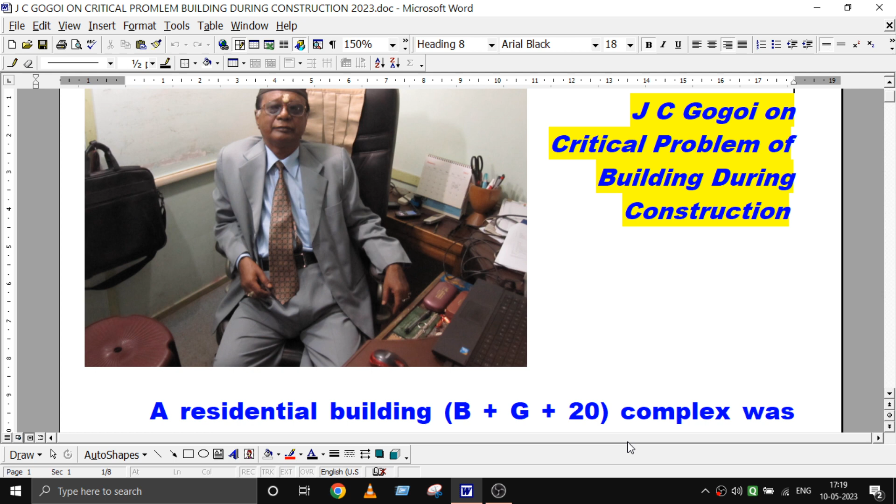Today, I want to discuss a critical building problem during construction, neither of which can be termed as a failure or any kind of failure, although there are severe structural cracks developed. I was appointed as a rehabilitation consultant for a quite big residential building, about a 22-storied building complex

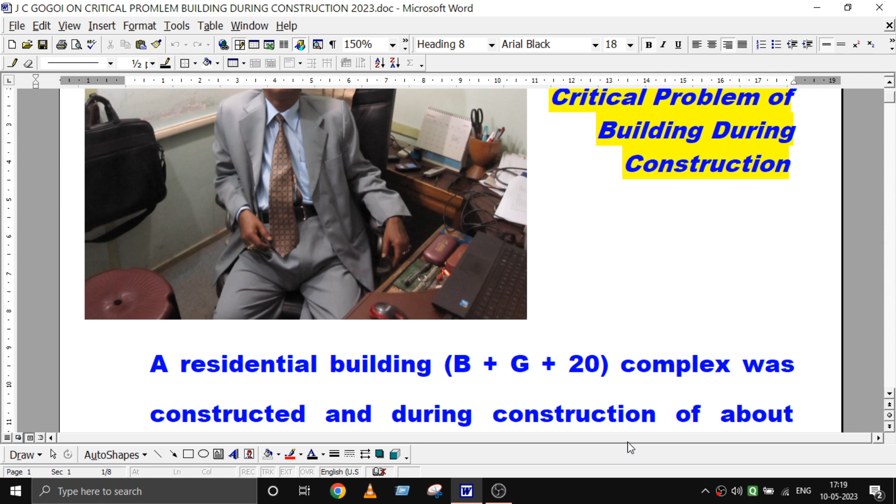which was constructed during 2022, and I was appointed just after the commencement of second story construction. Initially, I was informed that there was a serious foundation failure.

Normally, when I say it is foundation failure, there might be some SBC failure or excessive settlement. For any one of these reasons, the building may be termed as a foundation failure. But for a 22-storied building, during construction of the second story, in such cases, it cannot be a foundation failure. On principle, it is very difficult for me to digest this term foundation failure.

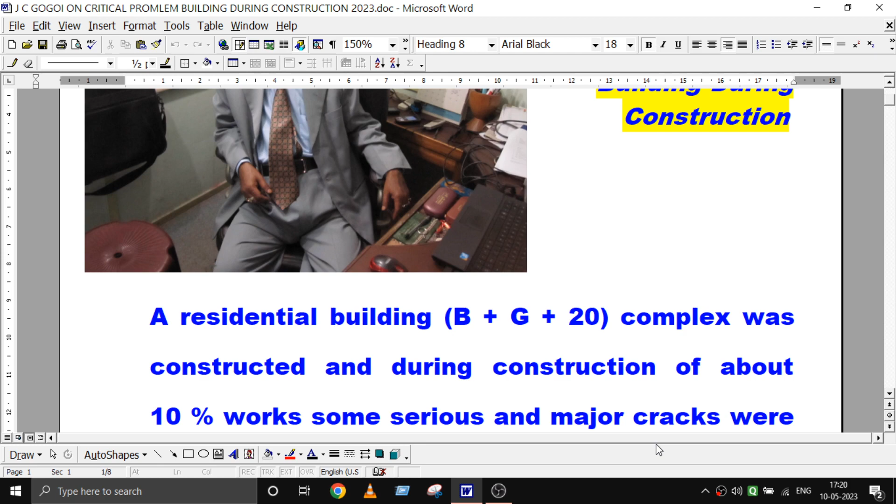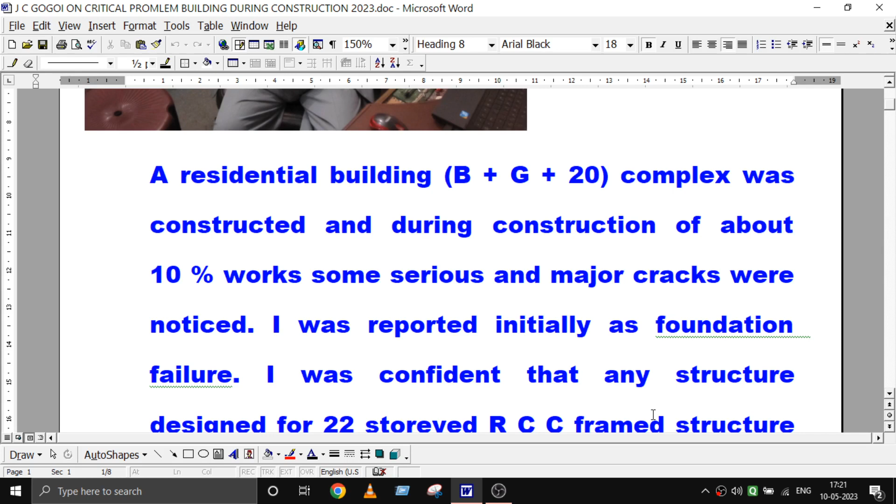The building was B plus G plus 20. It is a residential building. There will be a few blocks. The first block had started with an RCC raft foundation, that too at a depth of 8 meters below ground level.

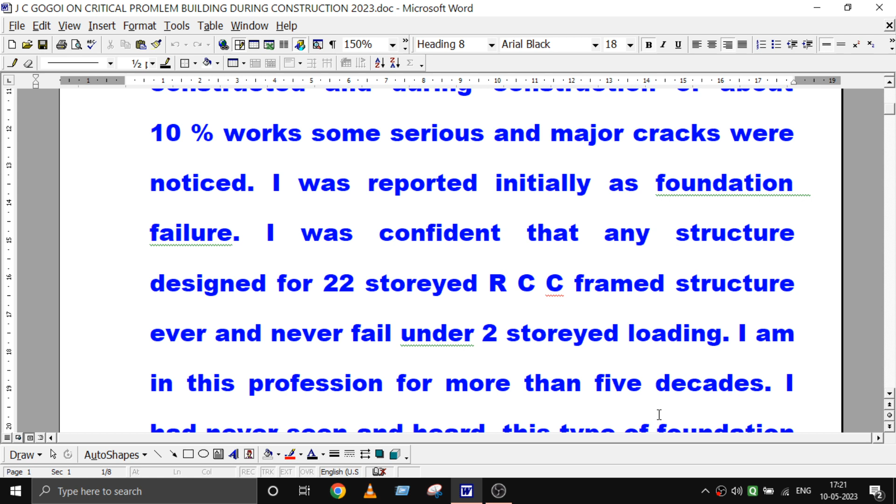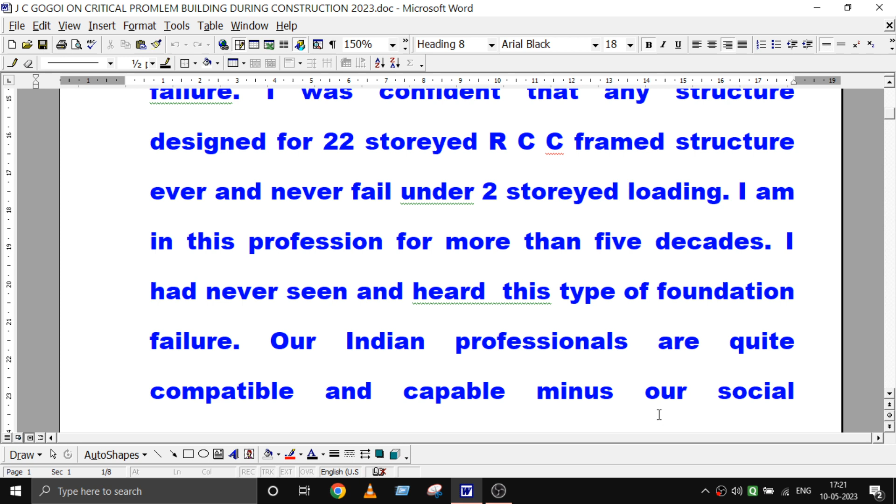I have been in this profession for more than 5 decades. I had never seen or heard of this type of foundation failure. I can confidently say our Indian professionals are quite competent and capable, minus our social recognition. Even our workmen are very much efficient in their own field.

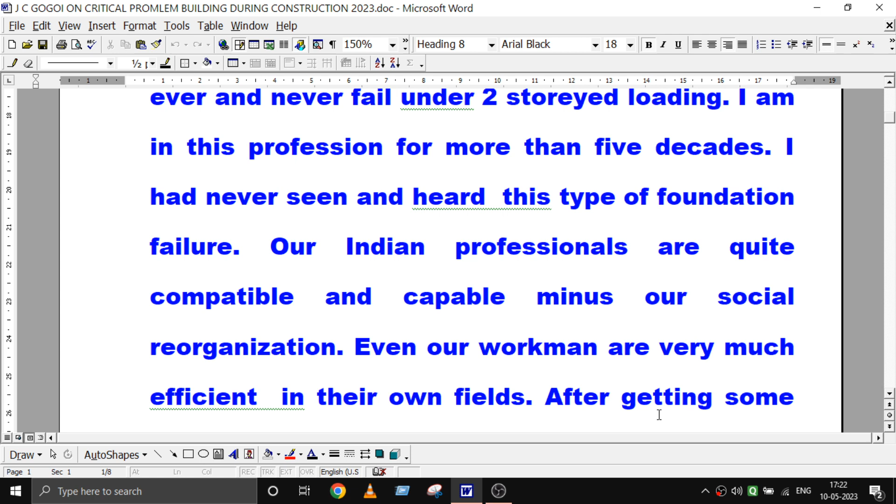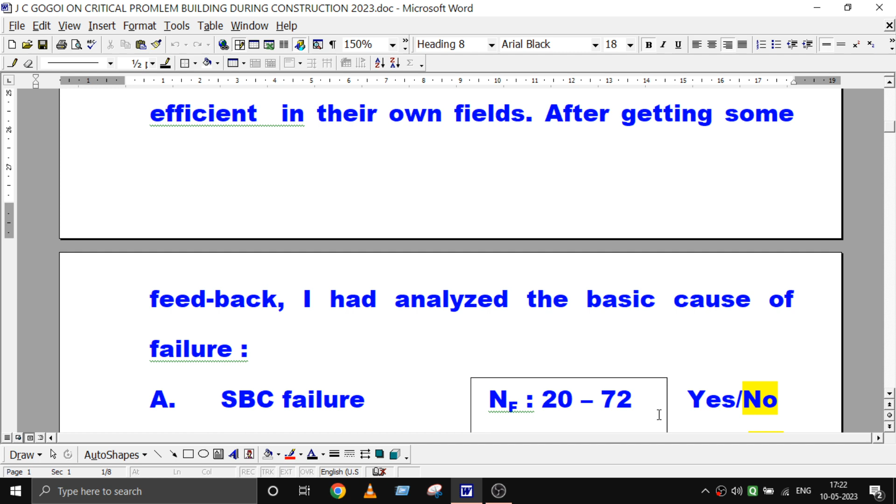The primary feedback I was furnished by my client and project consultant simply said that it is foundation failure. Under these circumstances, I considered some basic reasons for foundation failure.

It may be SBC failure, but we got information that the field N value recorded at ground level is 20, with a tendency of increasing with depth up to 72 at a depth of 30 meters. And the average N value at the mid height of the raft is 45. So it cannot be an SBC failure, since at an N value of 45, SBC shall be around 30 ton per square meter plus. So SBC failure has been ruled out.

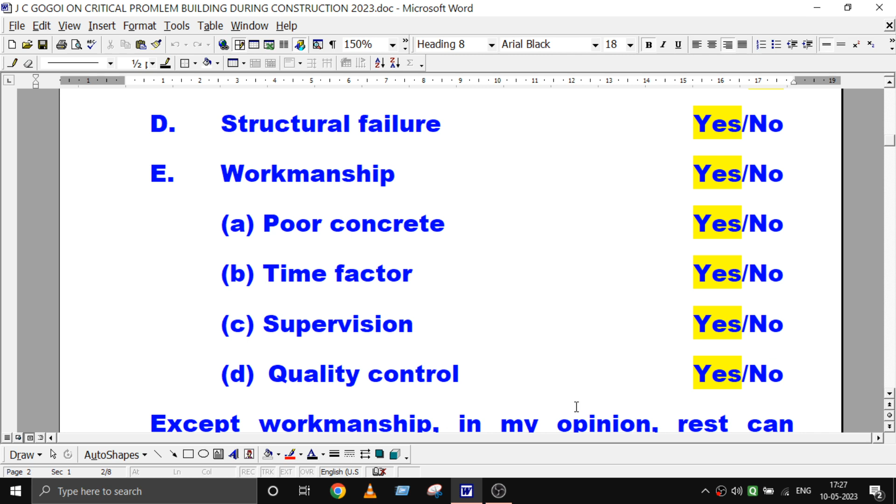The main demerit is workmanship. Workmanship, poor grade of concrete, time factor, lack of proper supervision, quality control. There is no quality control at all. So all these workmanship problems produced these cracks. It will be very difficult to disagree with me.

This is the raft. You see, this is a big pothole, about 1 meter. A big pothole is there. The raft is a solid base, about 1 meter or more. Concrete should be laid there with vibration. And such a big pothole is there. How can I say that quality is maintained? How can I say it is good workmanship?

No one can agree that it is good workmanship, good supervision, proper concreting, proper grade of concrete. No one can say that. Let us see.

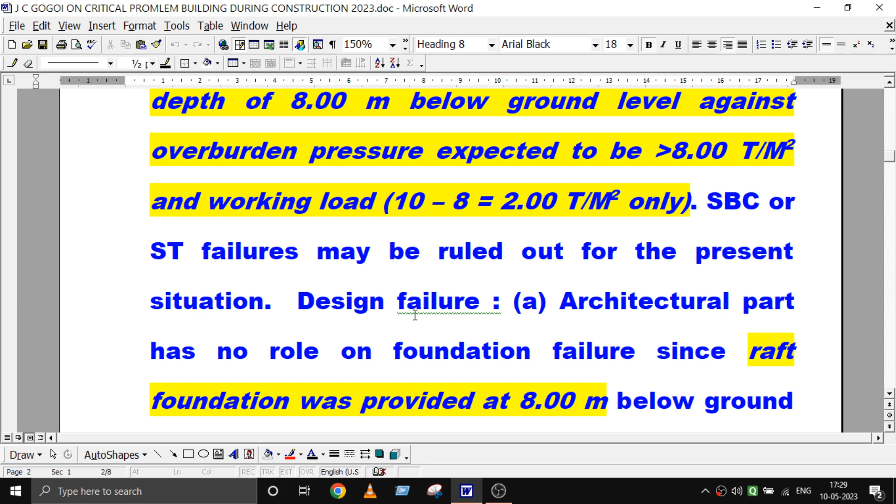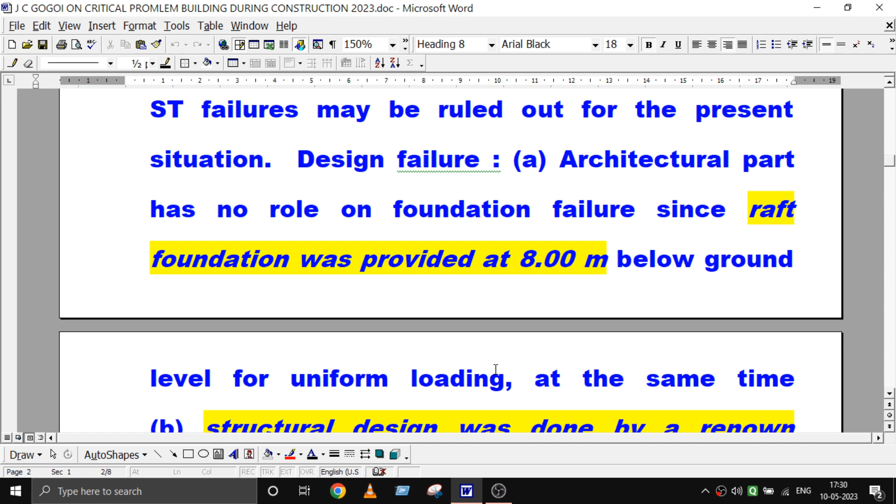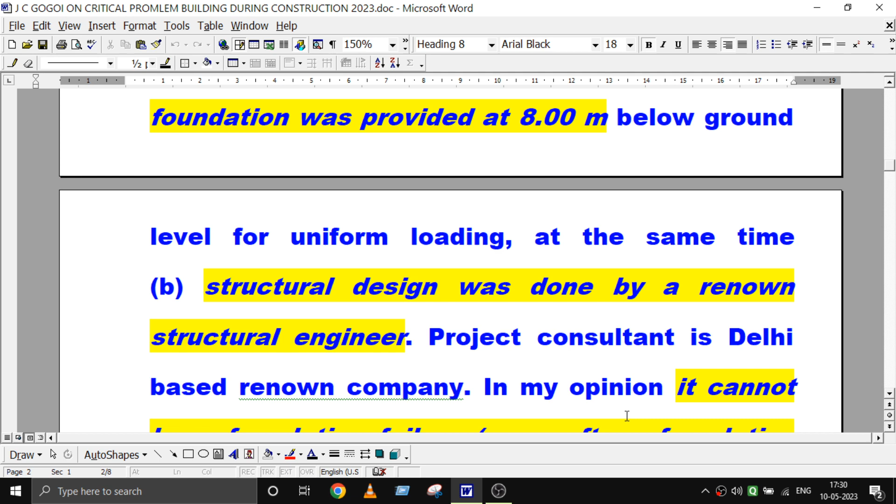This is at 2 ton loading. Lot of structural cracks are there. As I told earlier, SBC or settlement failure may be ruled out for the present situation. Design failure - the architectural part has no role in foundation failure since raft foundation was provided at 8 meter below ground level, for uniform distribution of load. So there cannot be any failure. Structural design was done by a renowned structural engineer, and the project consultant is a Delhi-based renowned company. In my opinion, it cannot be a foundation failure.

But however, more often foundation consultants have to face the blame because it is very easy to transfer the demerits lower down only - soil being the lowest one. So anyone can blame that the soil consultant did some mistake. But when...

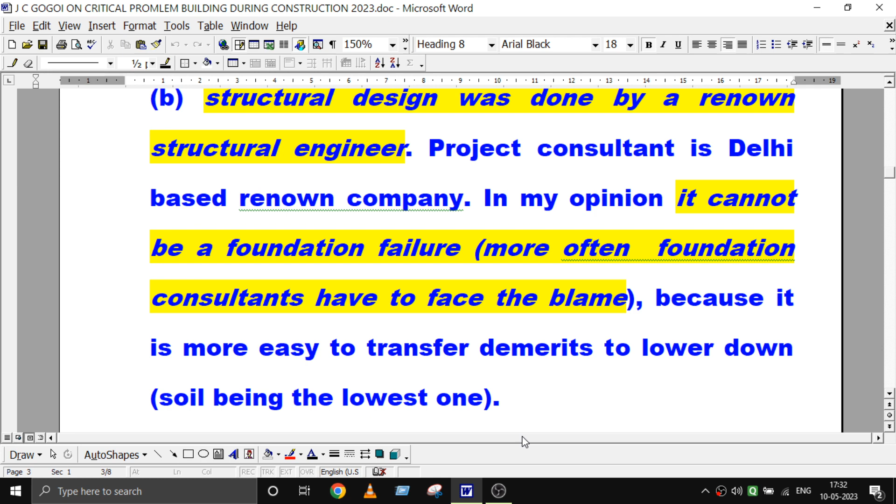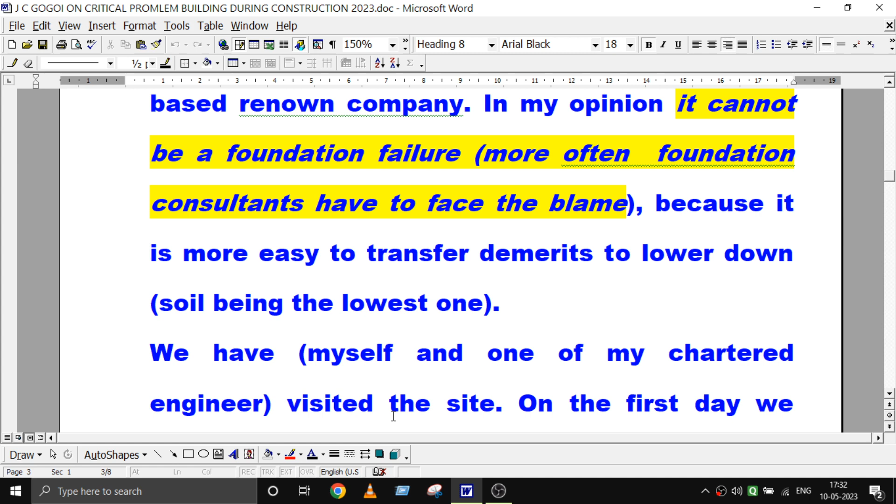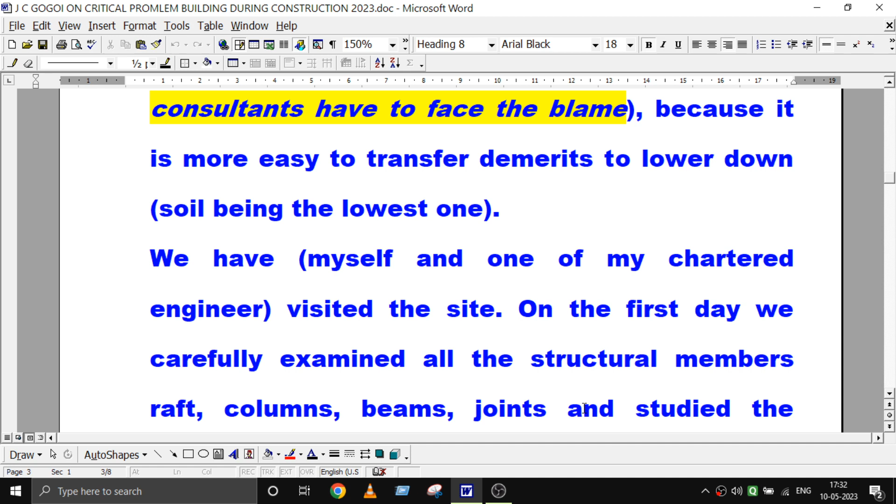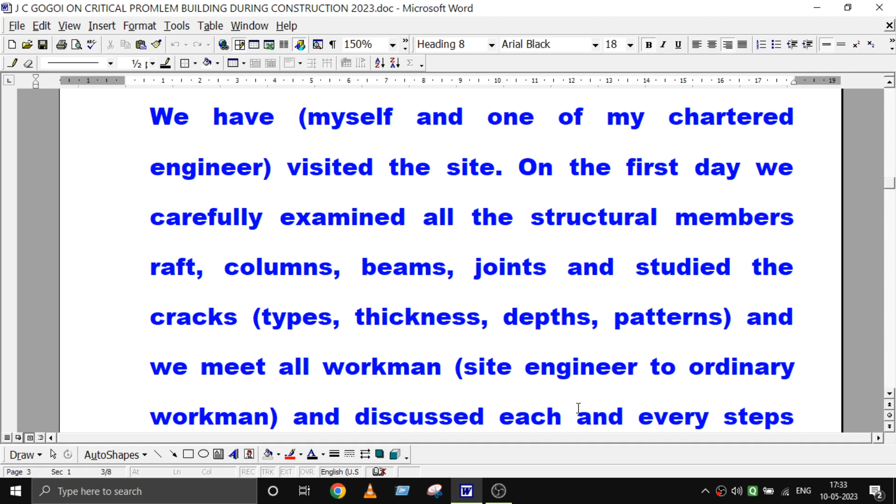So myself and one of my assistant chartered engineers visited the site and we discussed, carefully examined all the structural members - raft, column, beam, joints - and cracks were carefully studied, crack type, thickness, depth, pattern in detail. We discussed with all workmen at site, from site engineer to ordinary unskilled labor who was engaged for curing and watering. We took their involvement in the building construction period, and all of them are trying to give some protection to their own self, but...

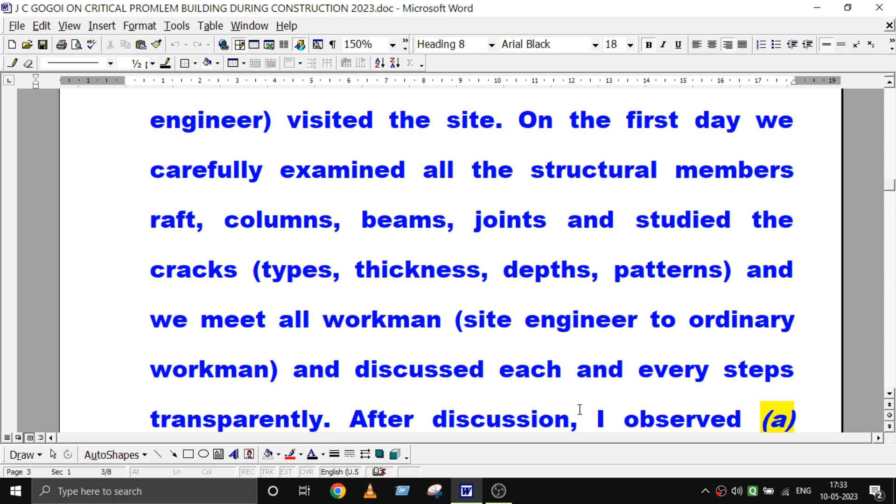These are all open secrets. After discussion, we finally observed poor quality, poor workmanship. In between, concrete quality control is included, supervision is included - it is very poor quality. And the time factor - not at all given appropriate time.

For initial setting also, we require - initial setting and final setting we require almost in winter season. For final setting it requires about 48 hours, not exactly 8 or 10 hours. Although the company says it is 8 hours, but especially in winter season when temperature is below 15-20, because our required temperature for curing is 27 degrees. Artificially we cannot make our environment in winter about 27 degrees. So we have to accept nature - we cannot overcome nature, we have to accept the principle of nature.

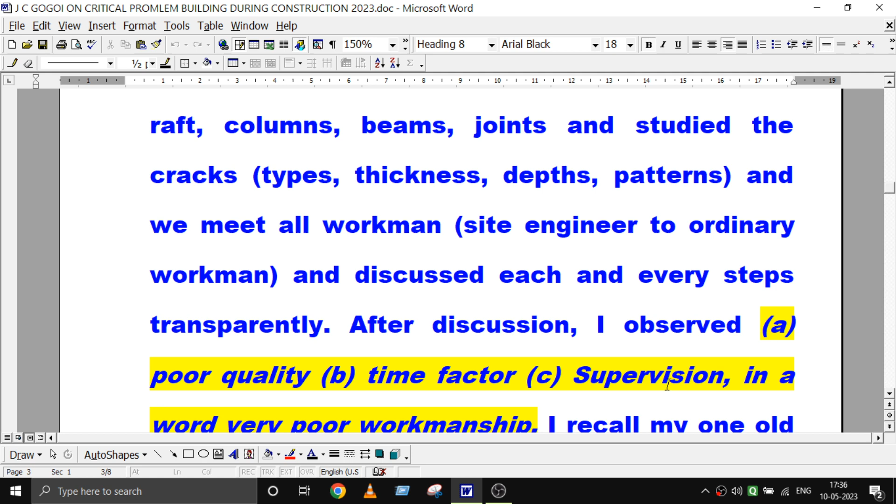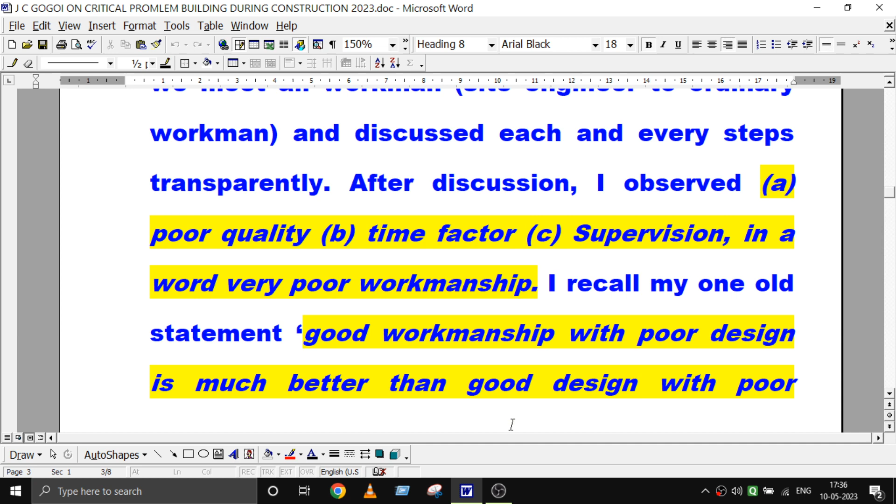I recall one of my old statements. I said in a conference, good workmanship with poor design is much better than good design with poor workmanship, which was at that time very highly and sharply criticized. I was not going to blame anybody. I have never said that engineers are not at all responsible, but I want to give more importance to workmanship.

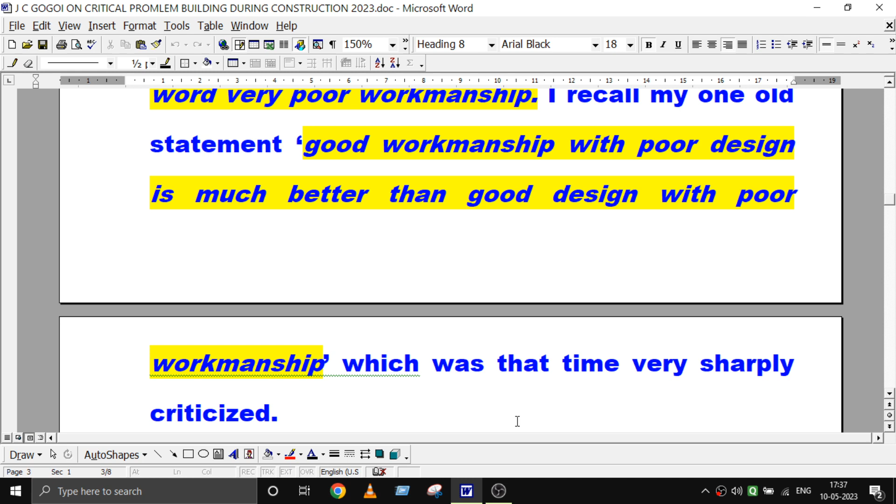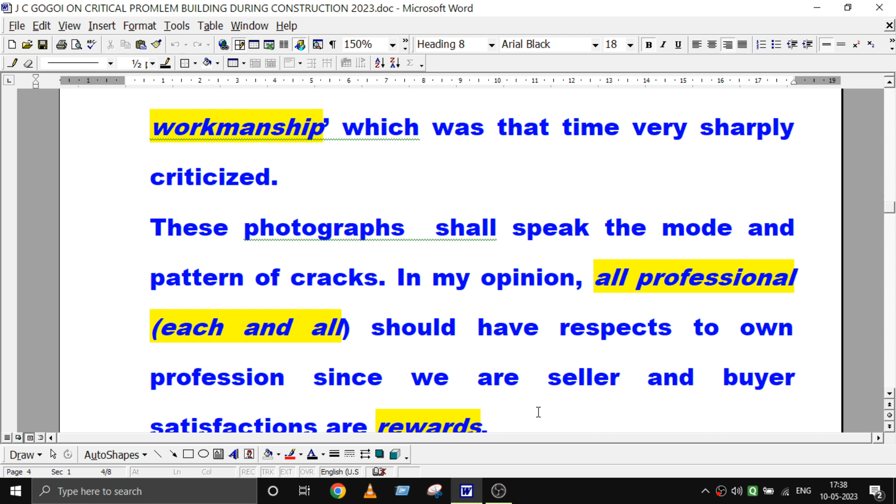But that was misinterpreted during that time. Now, many a time, I saw these things only. There are some photographs we have collected, and all these photographs shall speak the mode and pattern of cracks. In my opinion, all professionals should respect their own profession since we are sellers, and buyers' satisfaction is our reward. Professional means we are selling our technical know-how, and when our buyer is satisfied, that is our reward.

You see, this is the raft. Here, without backfilling the side of the raft - because it is basement, so it is ground floor slab - this basement should be filled, because during excavation the load at the raft will be not uniform, because some lateral support shall be necessary. Without lateral support, here it is 8 meter on raft, here it is 8 meter outside.

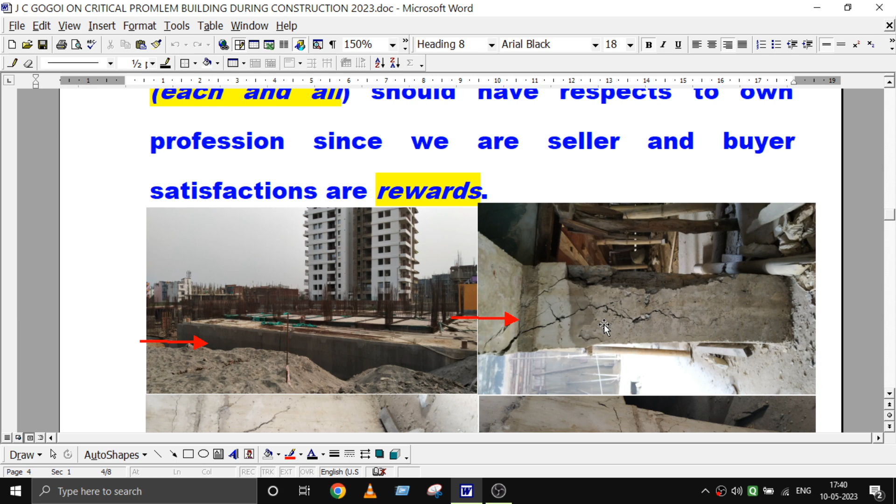Column beam joint crack. This is the column beam - this is beam, this is column. You see. This is column, this is column. And this is

beam crack. Here also a lot of micro cracks are there. These are all micro cracks. Not only this one crack, there are a lot of cracks everywhere. Here also there are a lot of cracks.

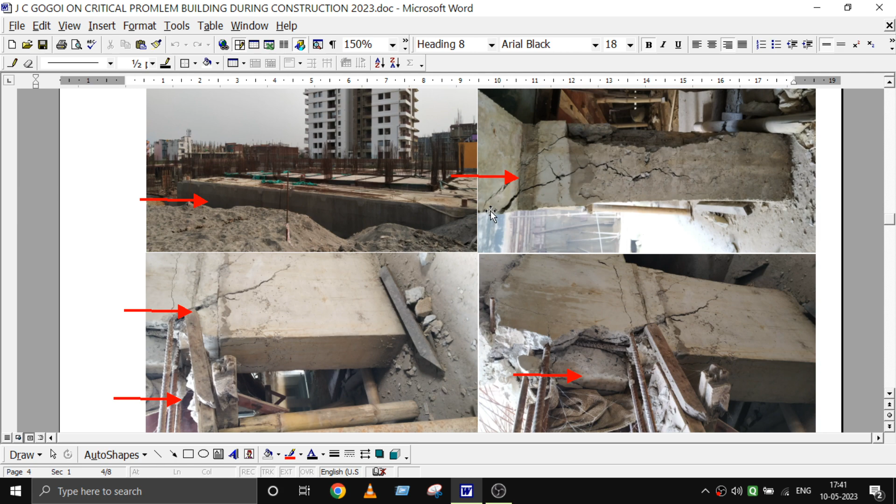If you see from this side also, there are a lot of cracks. Here you see one crack, again another crack. These are a lot of cracks already developed.

This is, you see, the beam junction. This is the column, and this beam is - this is the joint, these cracks. And already I said it is the pothole of the raft.

After seeing this pothole of the raft, I cannot say that the concrete quality is good enough. I shall be now going...

There is some, on my instruction, they have conducted a lot of tests, and earlier also they have conducted some non-destructive concrete test using N-type hammer. It is a good hammer. It is corresponding to 150 mm by 150 mm cube concrete.

Almost 95 to 99% accuracy is there - not less than 95, and up to 95 to 100%. Same parameters I observed in my laboratory and at site. I am observing this accuracy is 0.95 to 0.99, 0.999, like that.

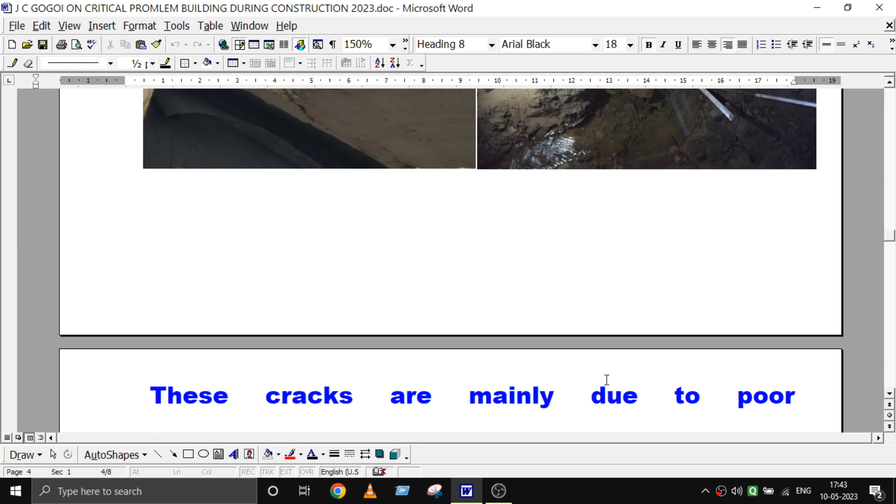These cracks are mainly due to poor workmanship, consisting of quality and time factors. We did not allow sufficient time for final setting. As I told, in winter at 13, 14 degree temperature, the normal 8 hours, 10 hours initial final setting is not sufficient. It may require 3 to 4 days for setting. For initial setting also it may require 1 day, which normally should be less than 60 minutes or so.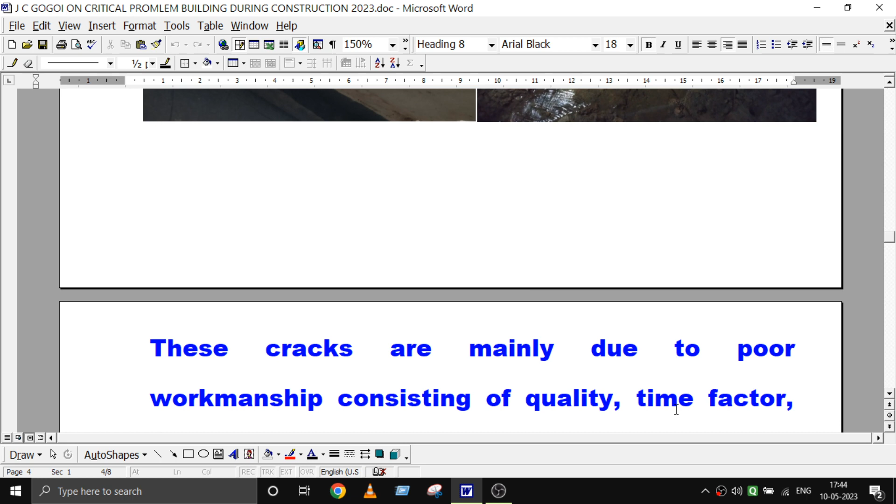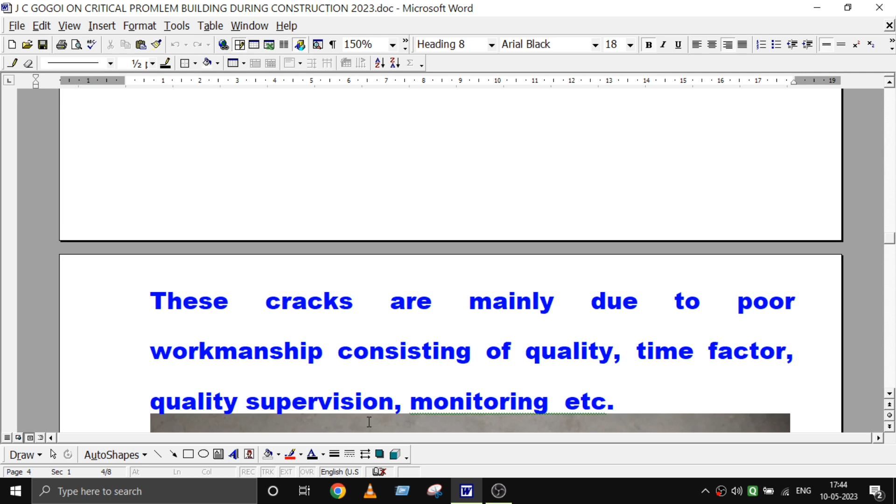Quality supervision and monitoring - in the absence of these things, this structure has been severely affected. You see, these are the cracks on the raft.

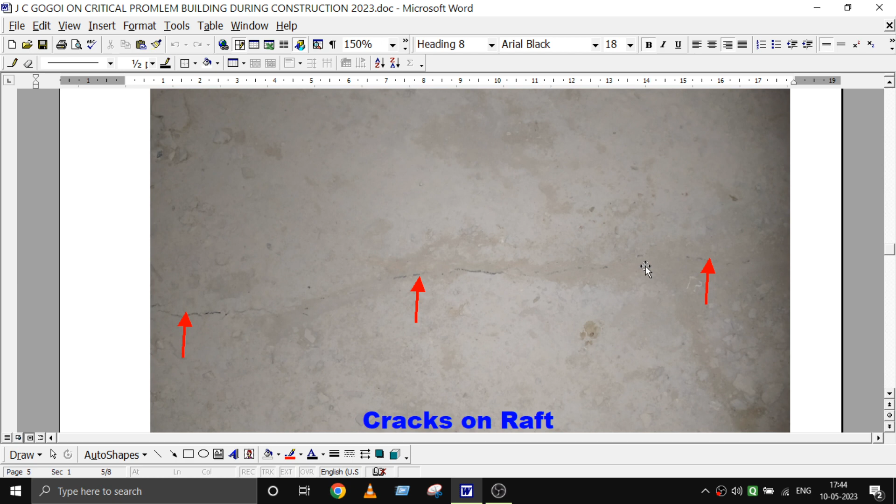Here also these cracks had developed. These cracks, later on, someone tried to rectify by making some rich mortar, patching a little rich mortar. But that is useless - why they are doing this, I do not know.

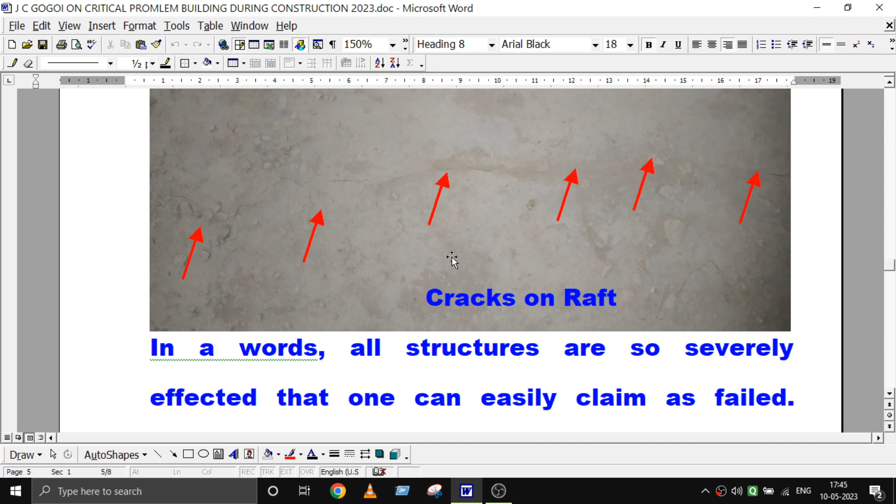In a word, all structures are so severely affected that one can easily claim it as failed. The only option will be to dismantle it, restart the construction from the initial point, and go up.

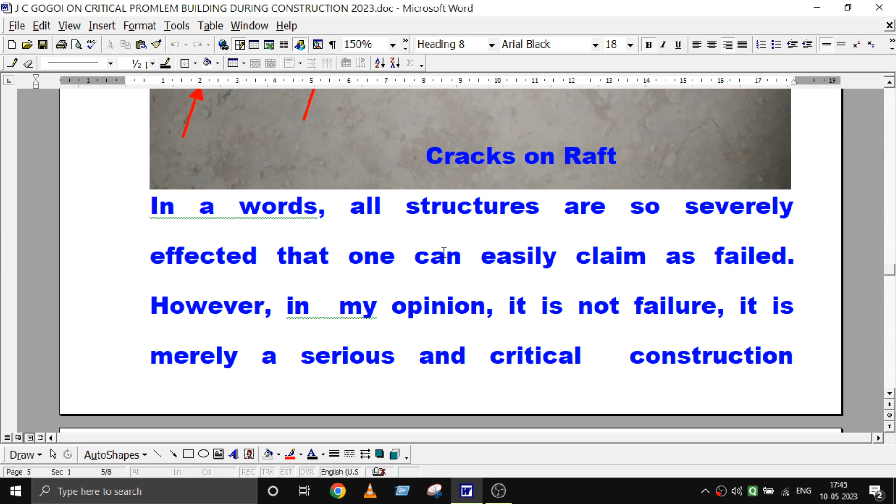However, in my opinion, it is not a failure. It is merely a serious and critical construction problem, which is our own self creation. We have created this problem ourselves.

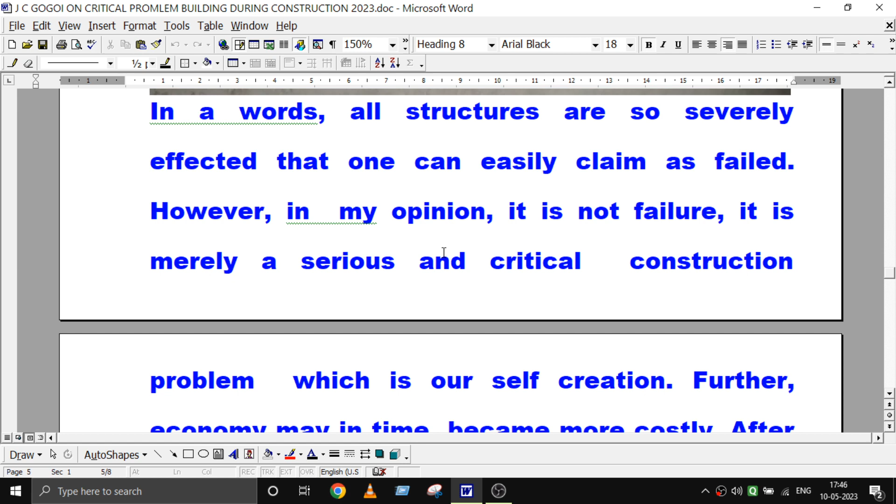Further, economy - that is, time factor. We are trying to save time only because of economy. But time economy may in time become more costly.

As I told, there is no proper supervision, and based on my experience and during visits, what I find is the structure was designed with a concrete FCK - which is called compressive strength of concrete, crushing strength of the concrete - of 25 MPa, that is 25 Newton per millimeter square.

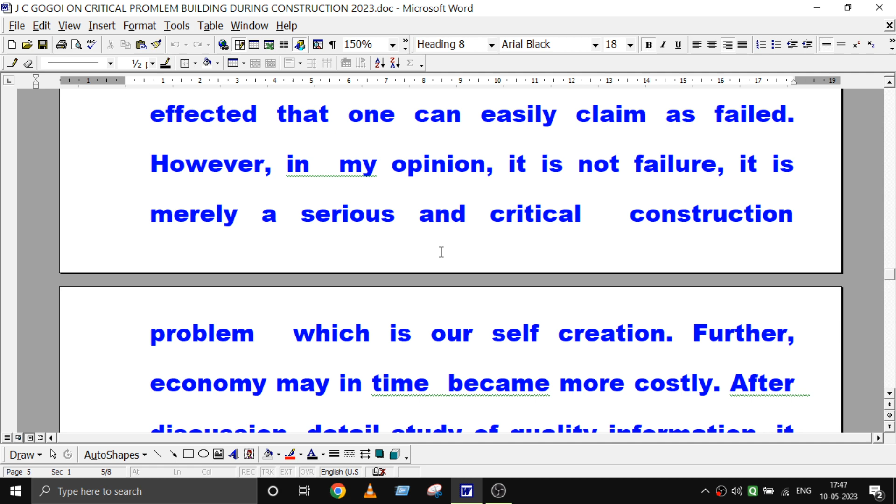Instead of 25, what do we require? Instead of 25, our targeted strength shall be 32 MPa, because 25 plus 1.65 into 4, so our targeted strength is 31.6, rounded up to 32, we require. If we get 32, then our structure we can say our design is for M25.

But in this case, the question of 32 - the targeted strength of 32 MPa - does not arise. Mostly it varies from 12, in 1 or 2 tests it was found 20, for the rest almost it is around 15, average we can say 15. If we are getting 15 as standard and we neglect the standard deviation, how much will it be? M12.

So M12 cannot be used in RCC structure. It has no strength - it is only for some mass concrete work. Up to M15 it is mass concrete work. For mass concrete also, for M15 also, we need...

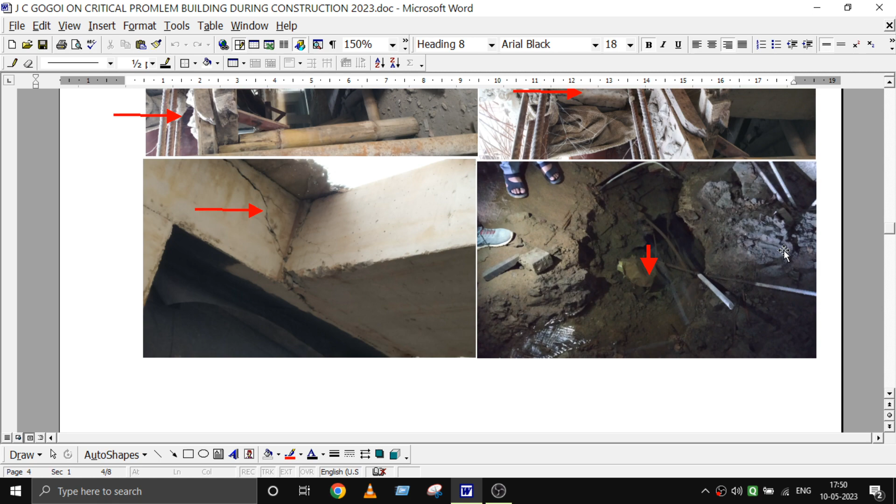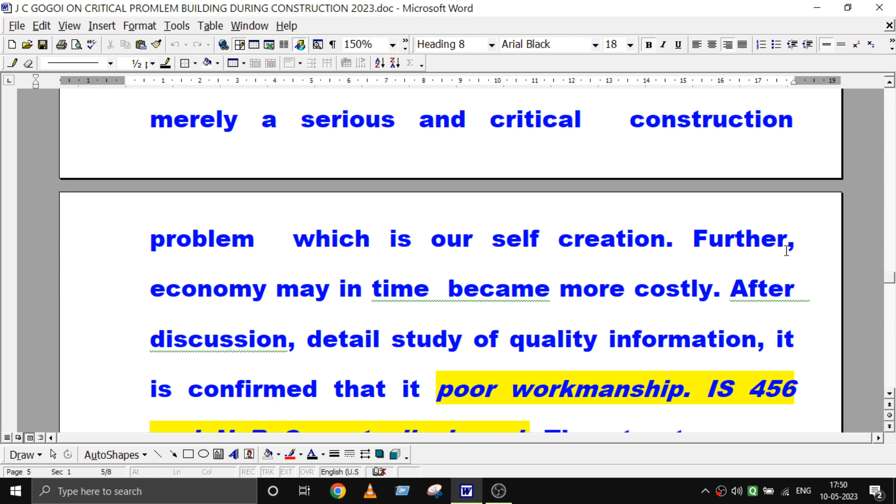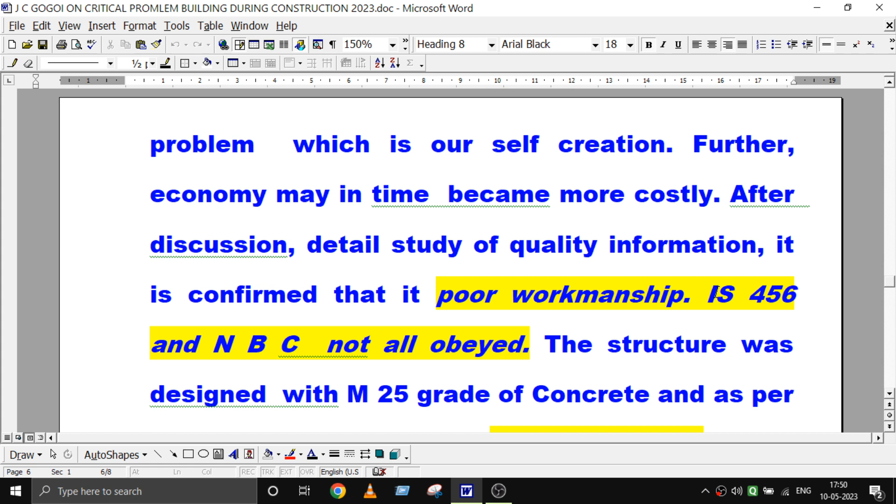Under these circumstances, given this critical construction problem we have created, we should better go for rehabilitation works. In my opinion, besides workmanship, none of the codes - IS 456 or NBC, the National Building Code published by BIS - are strictly followed.

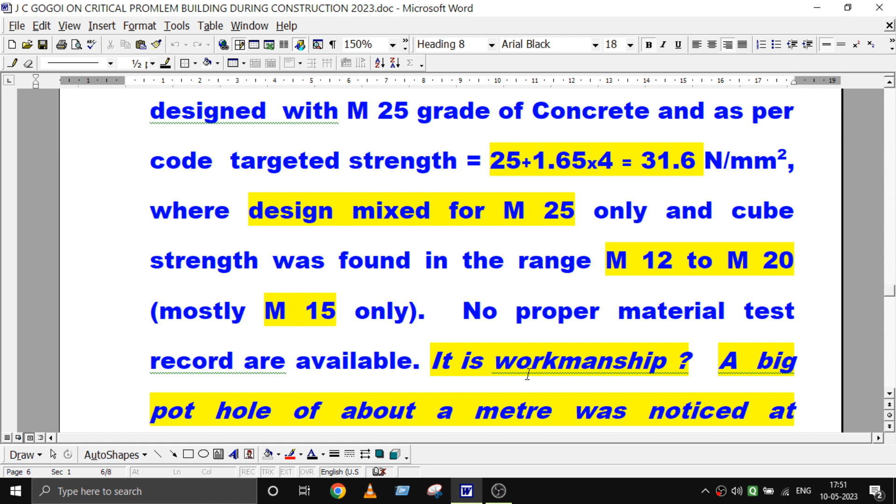Earlier I said M12 to M20. In comparatively few locations, about 5%, they get M20, and the rest is 12, 15, 17, mostly M15. So no proper material test records are available, no concrete cube test records available. So how can I say that this quality is as per requirement?

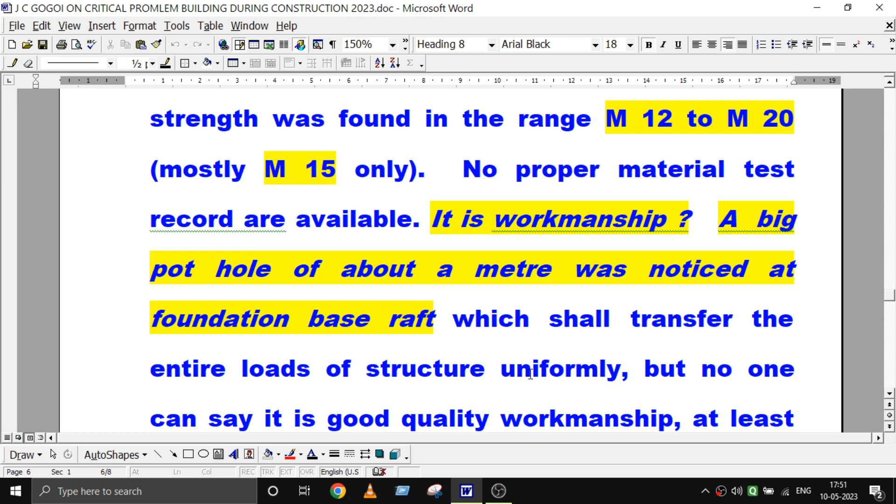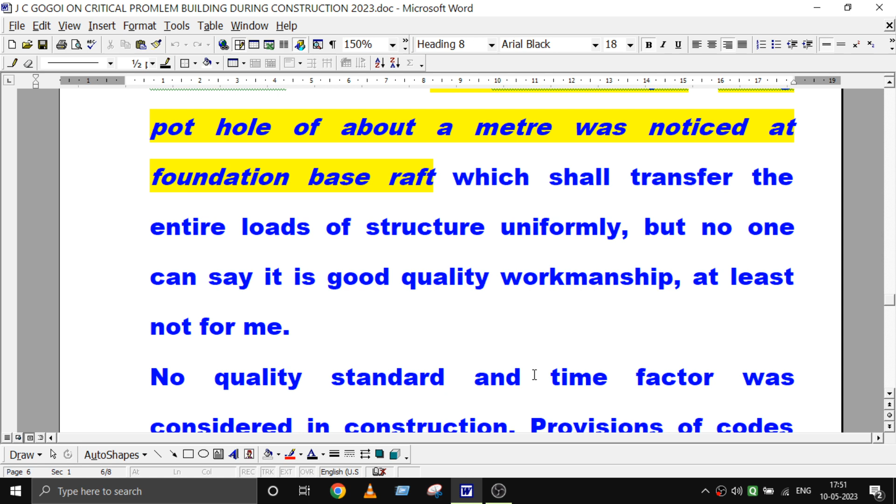Anyway, quality standard for rehabilitation works, and the time factor, was considered very essential. There is a saying - hurry ends burry, hurry ends burry. If we rush, we may lose something.

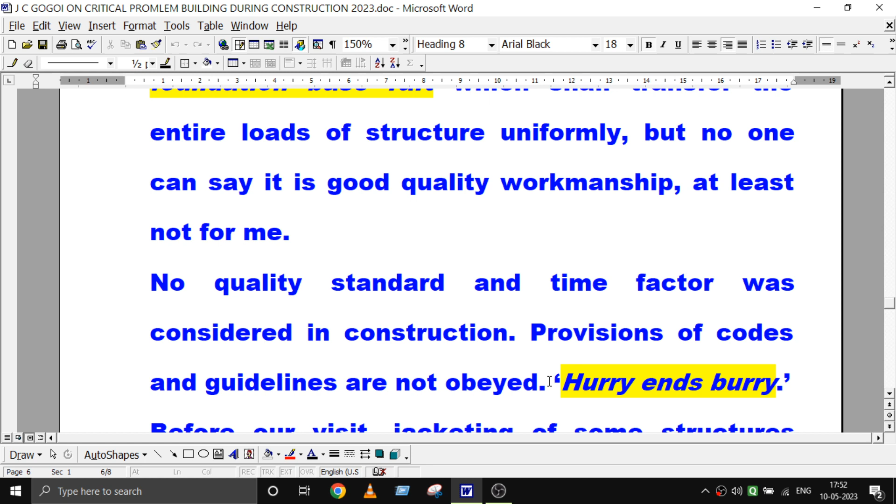Before our visit, they had started and prepared some surface jacketing for the structure. They had done some cutting and removing in some areas for additional jacketing with M40 grade concrete.

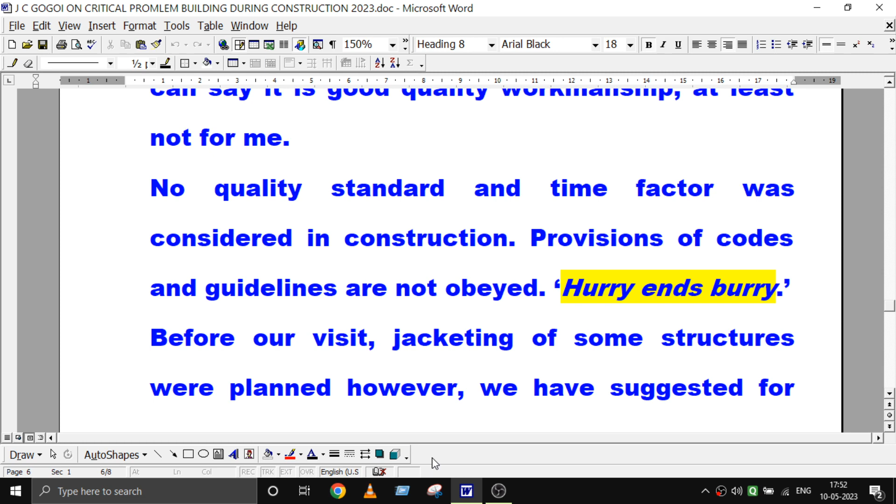We suggested this jacketing work should not be done right away. Before the jacketing work, all structural members should be strengthened using epoxy grouting, engaging one professional agency. Only then should they start the jacketing work in the next phase.

Soon after jacketing and epoxy grouting, we advise them to check the strength properly using an ND hammer, preferably N-type hammer, not an ordinary hammer, so that whole results come through. During selection of graph in the N-type hammer software, there is an option - select the ASTM curve, not any other curve. The ASTM curve is most purposeful, very informative, and very reliable.

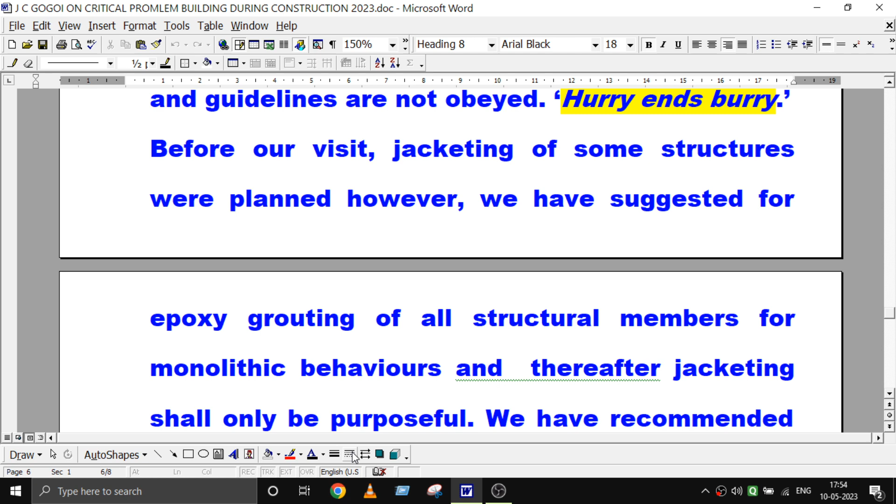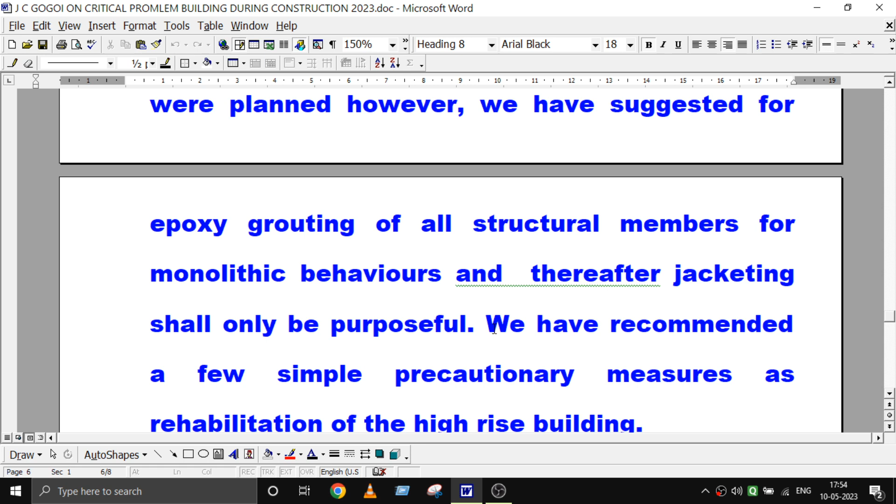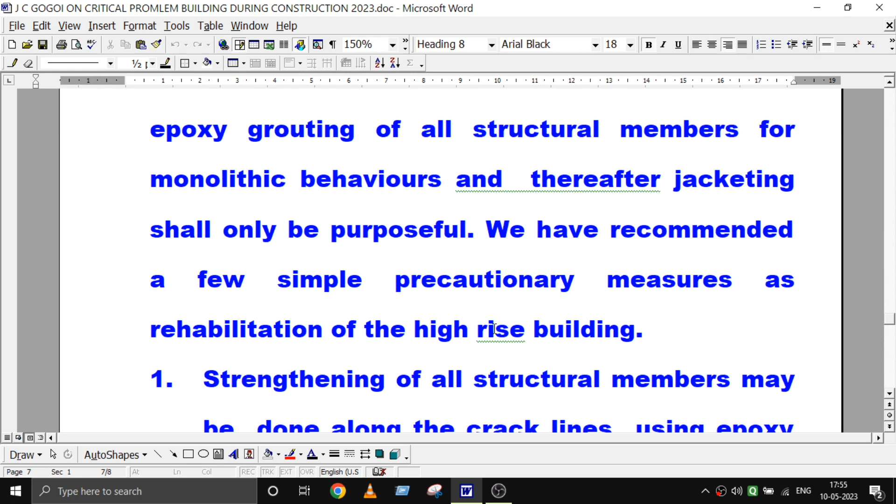After due consideration for rectification and rehabilitation of the structure, we have recommended a few simple precautionary measures for the safety of this high-rise building. Number one, as I told, strengthening of structural members may be done along the crack lines using epoxy grouting to attain FCK greater than 32 MPa.

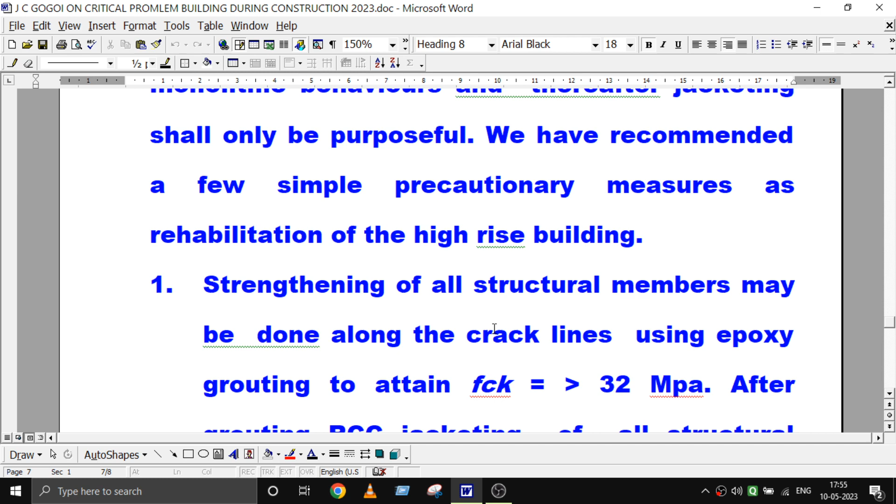In such cases, we can adopt M25 grade of concrete. After grouting the RCC structure, for jacketing of structural members with M40 grade concrete, please target the targeted strength of 48.60.

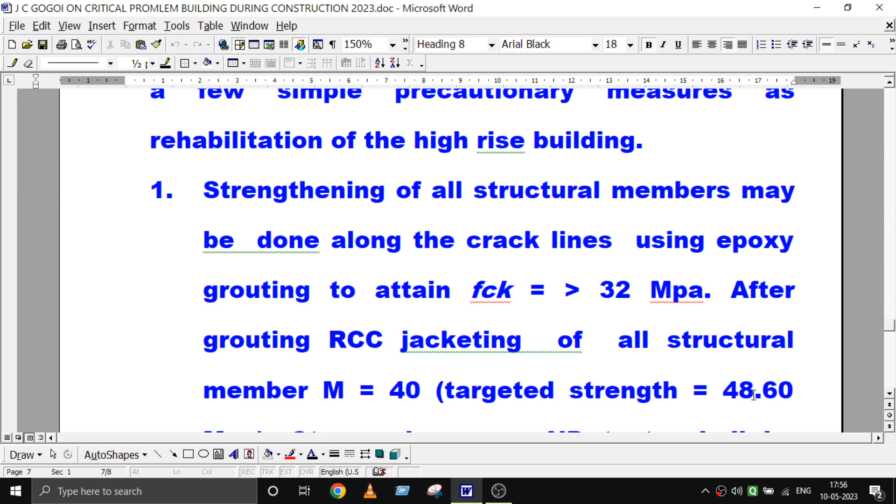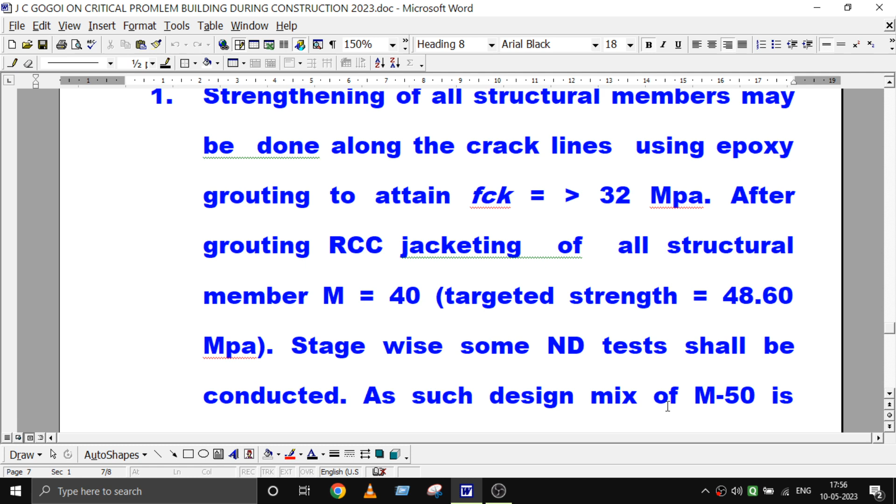So to get 48.6, roughly 49, we shall go for M50 mix design. The limiting stage - mix design shall not be so limiting; it is not mathematical calculation. We should go for actual value, strength. Stage-wise, some ND tests shall be conducted, and mix design for M50 is recommended.

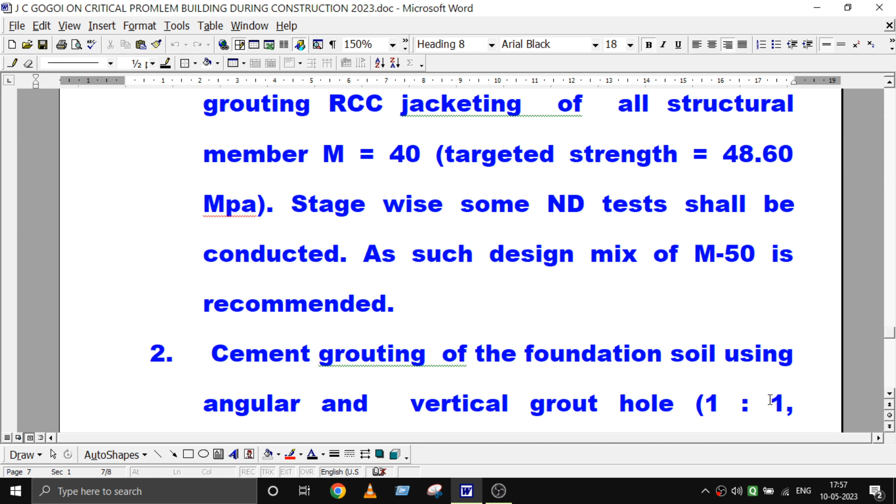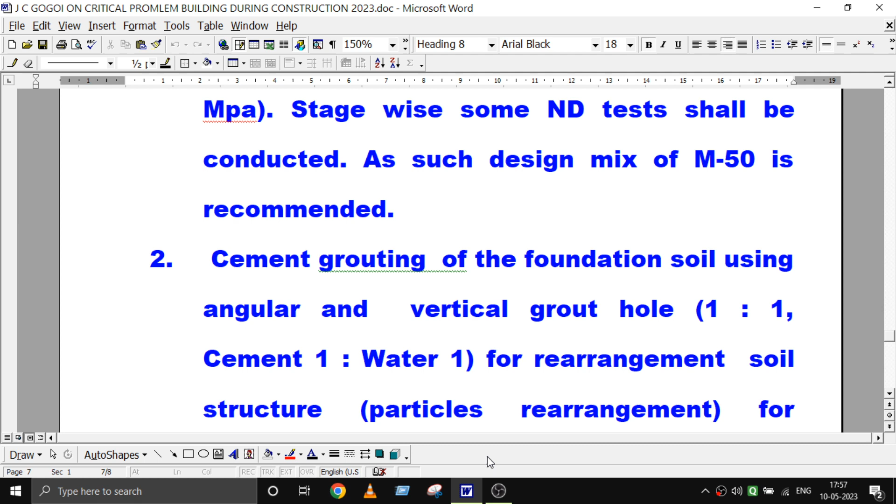After that, during these cracks there may be overloading somewhere, or low loading, or vibration causing soil formation issues. So we suggested cement grouting of the foundation soil using angular and vertical grout holes with 1:1 cement water ratio for rearrangement of the soil structure - not the whole soil system, but rearrangement of some particular displaced particles.

This is for thixotropic regain of lost soil strength. It will be very purposeful - the soil shall behave like reinforced soil.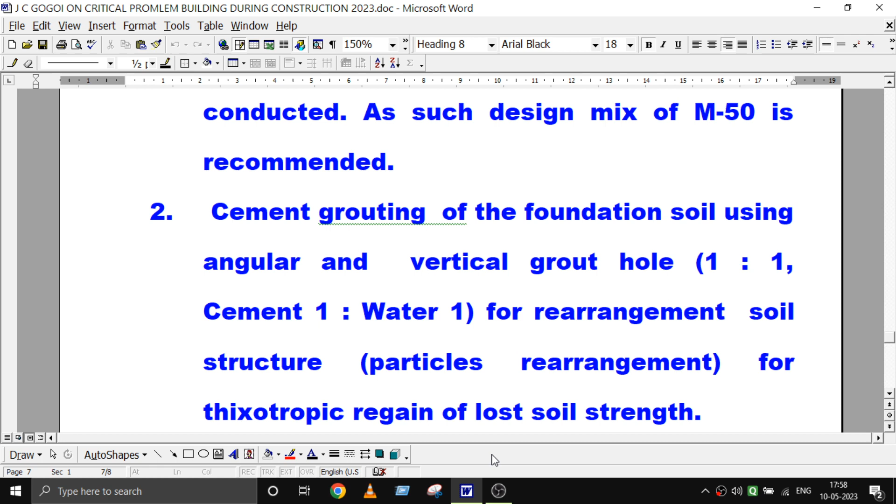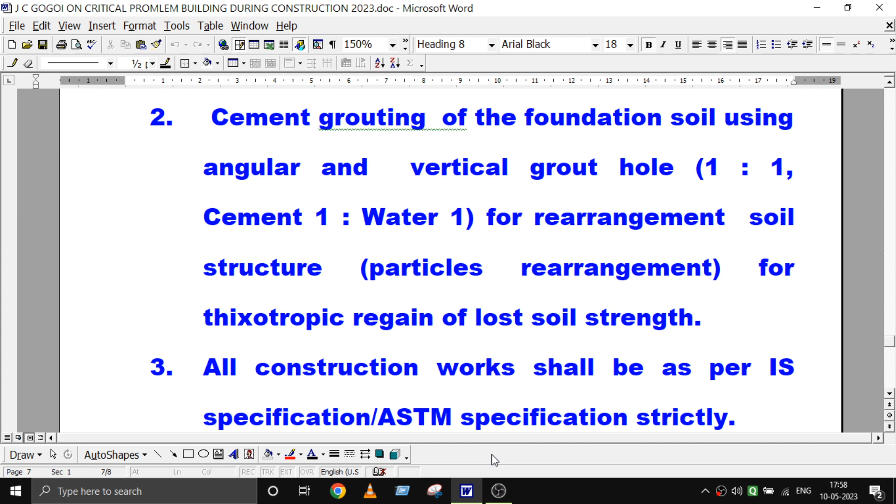After proper cement grouting, at 30 degrees or 25 degrees, if we grout from one end to the other, it will be possible to cover one side to the other. A professional agency can calculate at what angle and from what distance it can be grouted. All construction work shall be as per IS specification or ASTM specification, very strictly.